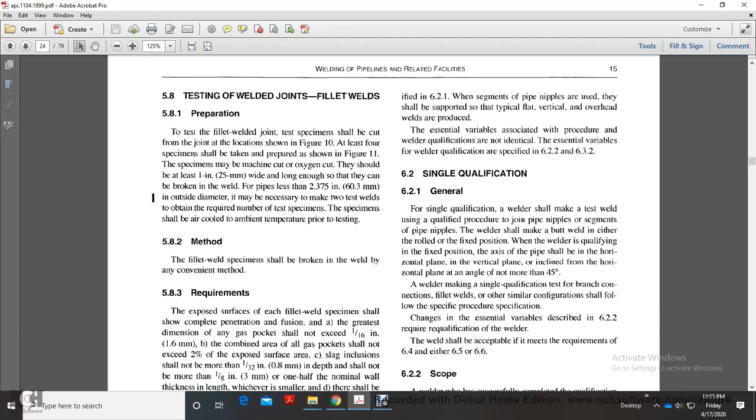A welder making a single qualification test for branch connections, fillet welds, or other similar configurations shall follow the specific procedure specification. Changes in the essential variables described in 6.2.2 require requalification of the welder. The weld shall be acceptable if it meets the requirements of 6.4 and either 6.5 or 6.6. Scope. A welder who has successfully completed the qualification test in 6.2.1 shall be qualified within the limits of the essential variables described below. If any of the following essential variables are changed, the welder using the new procedure shall be requalified.

A change from one welding process to another welding process or combination of processes, as follows: a change from one welding process to a different welding process, or a change in the combination of welding processes, unless the welder has qualified on separate qualification tests using each of the welding processes that are to be used for the combination welding process. B. A change in the direction of welding from vertical uphill to vertical downhill, or vice versa. A change of filler metal classification from Group 1 or 2 to Group 3, or from Group 3 to Group 1 or 2. A change from one outside diameter group to another.

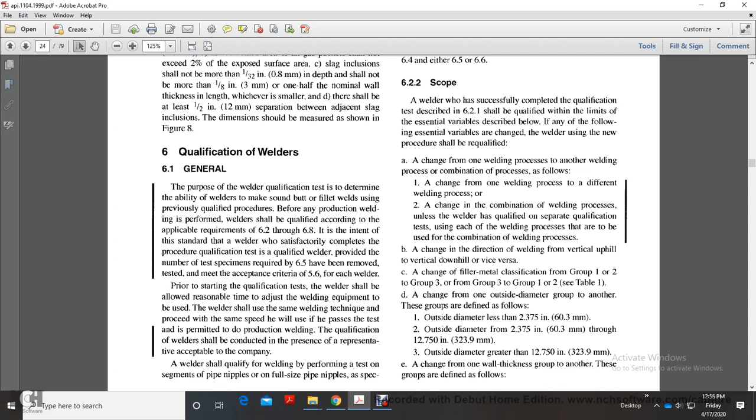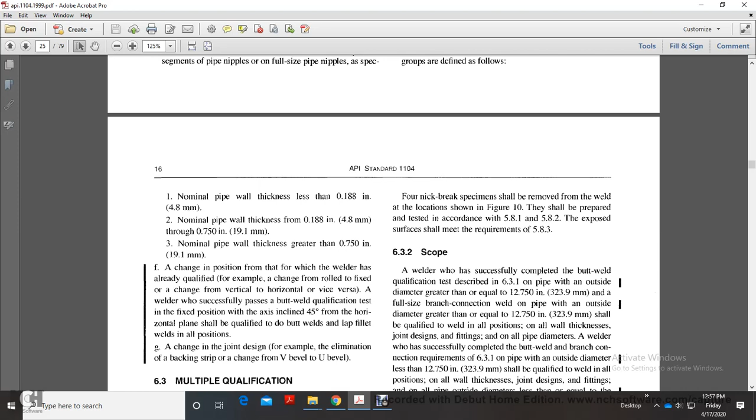These groups are defined as follows: outside diameter less than 2.375 inches, outside diameter from 2.375 to 12.750 inches, and outside diameter greater than 12.750 inches. A change from one wall thickness group to another. These groups are defined as follows: nominal pipe wall thickness less than 0.188 inches, nominal pipe wall thickness from 0.188 inches through 0.750 inches, and nominal pipe wall thickness greater than 0.750 inches. A change of the position from that in which the welder has already qualified.

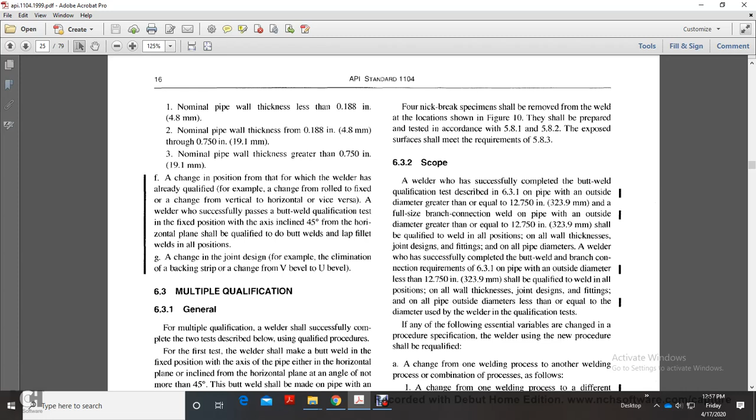For example, a change from rolled to fixed, or a change from vertical to horizontal, or vice versa. A welder who successfully passes a butt weld qualification test in the fixed position with the axis inclined 45 degrees from the horizontal plane shall be qualified to do butt welds and lap fillet welds in all positions. A change in the joint design, for example, elimination of the backing strip or changing from V to U bevels.

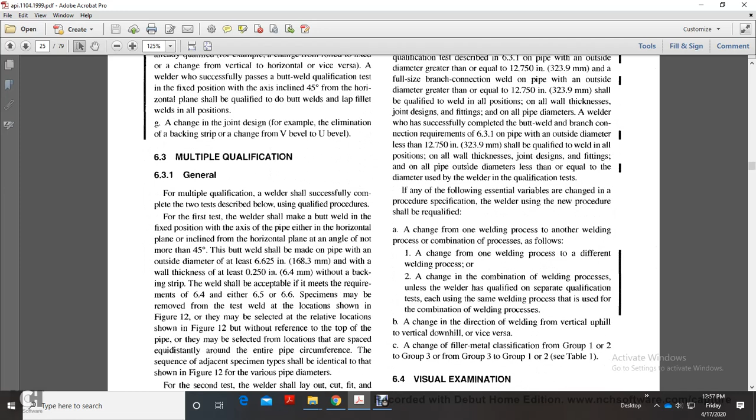Multiple qualification. For multiple qualification, a welder shall successfully complete the two tests described below using qualified procedures. For the first test, the welder shall make a butt weld in the fixed position with the axis of the pipe either horizontal or inclined from the horizontal plane at an angle of not more than 45 degrees. The butt weld shall be made on pipe with an outside diameter of not less than 6.625 inches and with a wall thickness of 0.25 of an inch without a backing strip.

The weld shall be acceptable if it meets the requirements of 6.4 and either 6.5 or 6.6. Specimens may be removed from the test weld at the locations shown in Figure 12, or may be selected at the relative locations shown in Figure 12.

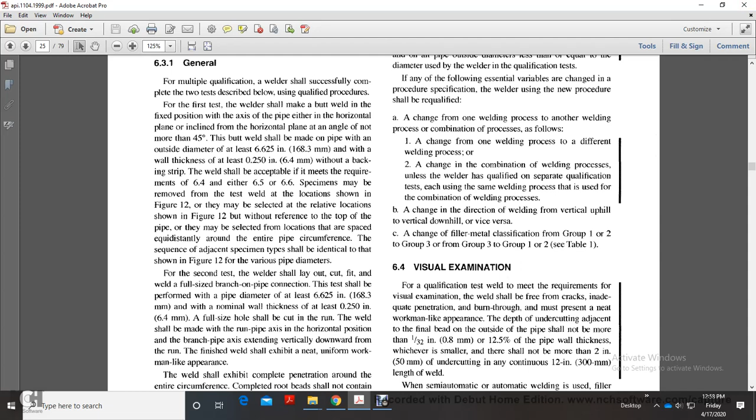But without reference to the top of the pipe, they may be selected with the location spaced equal distance around the entire pipe circumference. Sequence of adjacent specimen types shall be identical to that shown in Figure 12 for various pipe diameters.

For the second test, the welder will lay out, cut out, and fit and weld a full-size branch-on-pipe connection. The test should be performed with a pipe diameter of at least 6.625 inches and with a nominal wall thickness of a quarter of an inch. A full-size hole shall be cut in the run, and the weld shall be made with the run pipe axis in the horizontal position and the branch pipe axis extending vertically down from the run.

The finished weld shall exhibit a neat, uniform, workman-like appearance. The weld should exhibit complete penetration around the entire circumference of the completed root bead. It shall not contain any burn-through of more than a quarter inch. The sum of the maximum dimensions of separate unrepaired burn-throughs in any continuous 12-inch length of the weld shall not exceed 1/2 inch.

Four nick-break specimens shall be removed from the weld at the locations shown in Figure 10. They should be prepared and tested in accordance with 5.8.1 and 5.8.2. The exposed surface shall meet the requirements of 5.8.3.

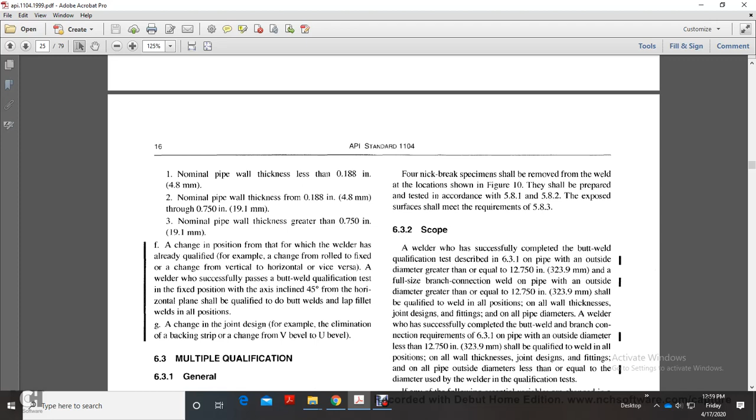Alright, 6.3.2 scope. If the welder has successfully completed the butt weld qualification test described in 6.3.1 on pipe with an outside diameter greater than or equal to 12 3/4 inches and a full-size branch connection on pipe with an outside diameter greater than or equal to 12 3/4 inches, they shall be qualified to weld in all positions, all wall thicknesses, joint designs, and fittings on all pipe diameters. If the welder has successfully completed the butt weld and branch connection requirements of 6.3.1

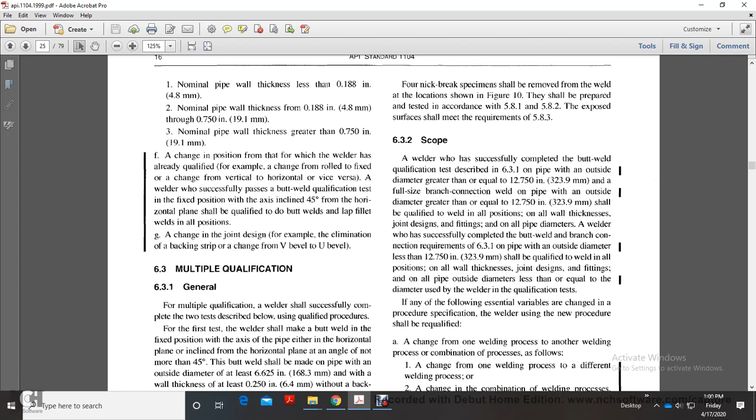on piping of outside diameter less than 12 3/4 inches, they shall be qualified to weld in all positions, on all wall thicknesses, joint designs, and fittings on all pipe outside diameters less than or equal to the diameter used in the welder qualification testing. If any of the following essential variables change in the procedure specification, the welder using the new procedure shall be requalified.

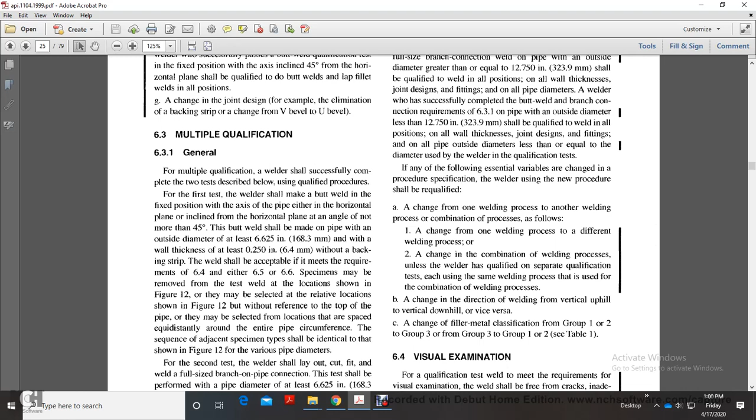A change from one welding process to another welding process or combination of processes, or a change in the combination of welding processes, unless the welder has qualified in separate qualification tests, each using the same welding process that is used for the combination welding procedure. A change in the direction of welding from vertical uphill to vertical downhill or vice versa. A change of filler metal classification from group 1 or 2 to group 3, or from group 3 to 1 or 2.

6.4 visual examination. For qualification testing, the weld shall meet the requirements for visual examination. The weld should be free from cracks, inadequate penetration, and burn-through. It must present a neat, workman-like appearance. The depth of undercutting adjacent to the final bead on the outside of the pipe shall not be more than 1/32 of an inch or 12.5% of the pipe wall thickness, whichever is smaller, and there shall not be more than 2 inches of undercutting in a continuous 12-inch length of the weld.

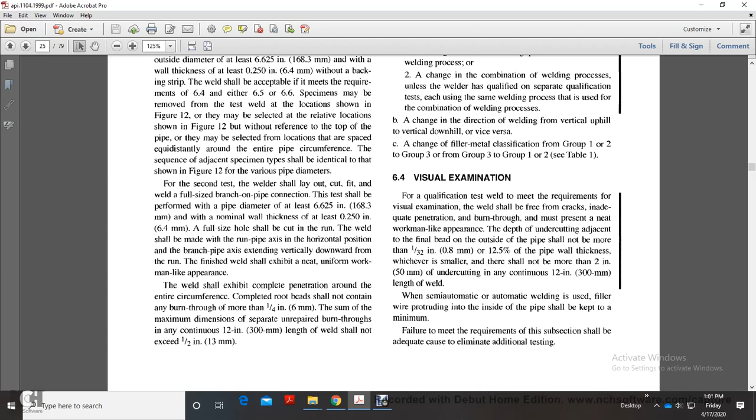When semi-automatic or automatic welding is used, filler wire protruding into the inside of the pipe shall be kept to a minimum. Failure to meet the requirements of this subsection shall be adequate cause to eliminate additional testing.

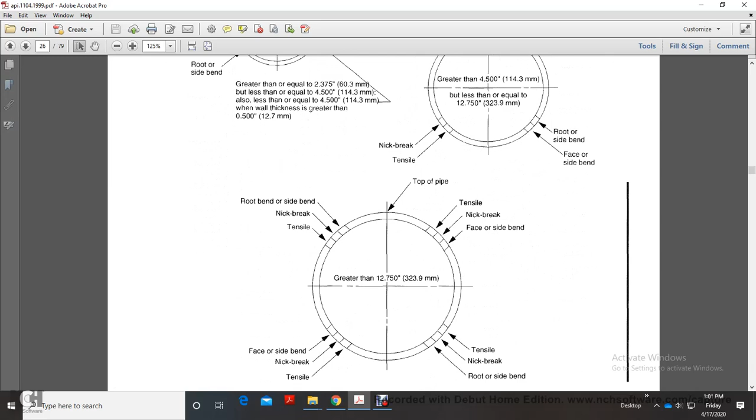figure table 3. Specimens shall be air cooled to the ambient temperature prior to testing. For pipe with an outside diameter less than or equal to 1.315 inches, one full pipe section specimen may be substituted for the root bend and nick break specimens. Full section specimens shall be tested in accordance with 5.6.2.2 and shall meet the requirements of 6.5.3.

6.5.2 Tensile strength, nick break, and bend test procedures for butt welds. Specimens shall be prepared for tensile strength, nick break, and bend tests. The tests shall be performed as described in 5.6. However, for the purpose of welder qualification, it is not necessary to calculate the tensile strength of the coupons. The tensile strength test may even be omitted, in which case the specimens designated for the test shall be subjected to the nick break test.

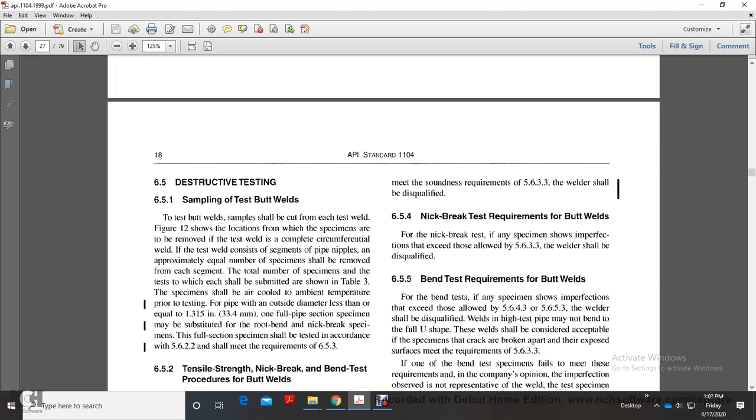6.5.3 Tensile strength test requirements for butt welds. For the tensile strength test, if any of the reduced section specimens or full section specimens breaks in the weld, or at the junction of the weld and the parent material, and fails to meet the soundness requirements of 5.6.3.3, the welder shall be disqualified. 6.5.4 Nick break test requirements for butt welds. For the nick break test, if any specimen shows imperfections exceeding those allowed in 5.6.3.3, the welder shall be disqualified.

6.5.5 Bend test requirements for butt welds. For the bend test, should the imperfections in a specimen exceed those allowed in 5.6.4.3 or 5.6.5.3, the welder shall be disqualified. Welds in high test pipe may not bend to the full U shape. These welds shall be considered acceptable if the specimens that crack are broken apart and their exposed surfaces meet the requirements of 5.6.3.3.

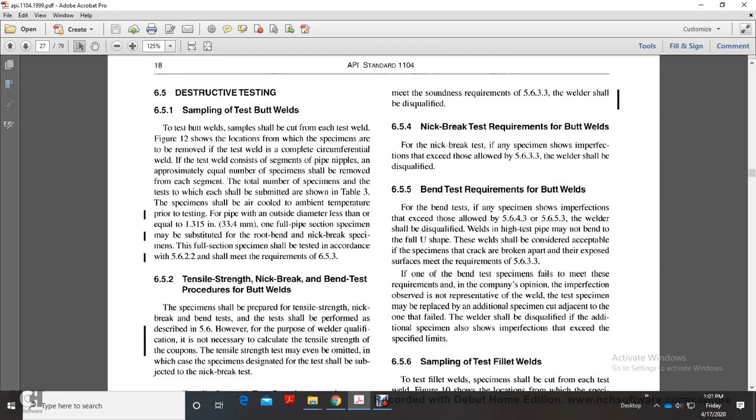If one bend test specimen fails to meet the requirements and, in the company's opinion, the imperfection observed is not representative of the weld, the test specimen may be replaced by an additional specimen cut adjacent to the one that failed. The welder shall be disqualified if the additional specimen also shows an imperfection exceeding the specified limits.

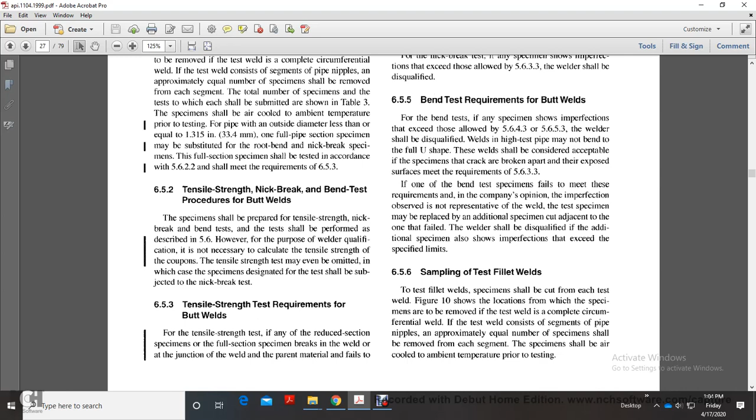6.5.6 Sampling and testing of fillet welds. Test fillet weld specimens shall be cut from each test weld; figure 10 shows the location from which specimens are removed. If the test weld is a complete circumferential weld, or the test weld consists of weld segments of pipe nipples, an approximately equal number of specimens shall be removed from each segment. These specimens shall be air cooled to the ambient temperature prior to testing.

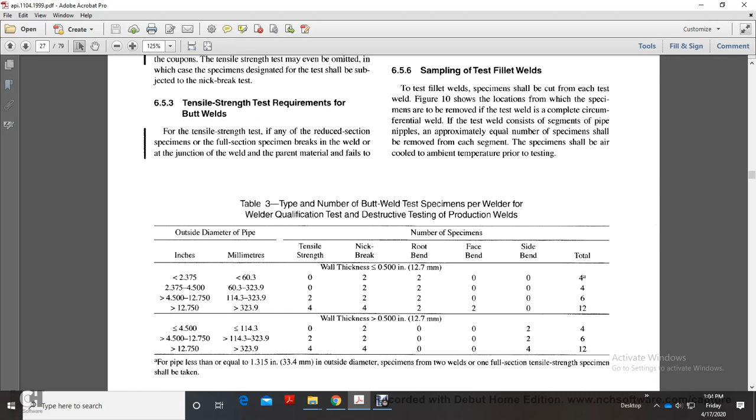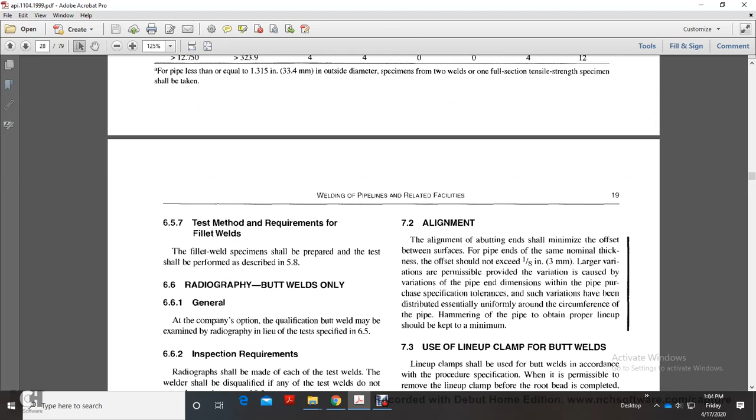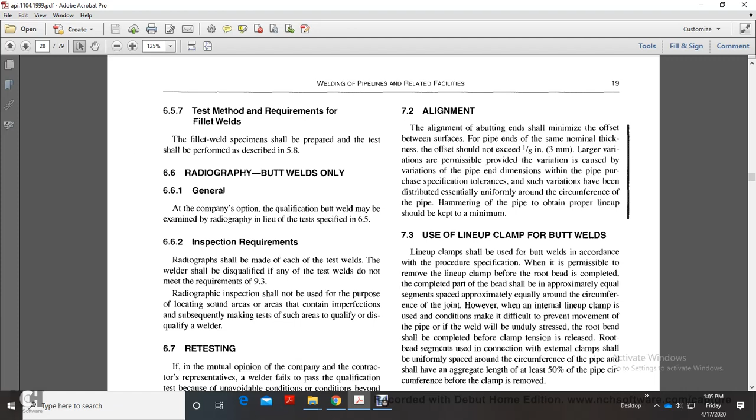Alright, 6.5.7, test method and requirements for fillet welds. Fillet weld specimens shall be prepared and the test performed as in 5.8 and 6.6. Radiography, butt welds only. General: at the company's option, the qualification weld may be examined by radiography in lieu of the tests specified in 6.5. 6.6.2 Inspection requirements. Radiographs shall be made of each of the test welds. The welder shall be disqualified if any of the test welds do not meet the requirements of 9.3. Radiographic inspection shall not be used for the purpose of locating sound areas or areas that contain imperfections and subsequently making tests of such areas to qualify or disqualify a welder.

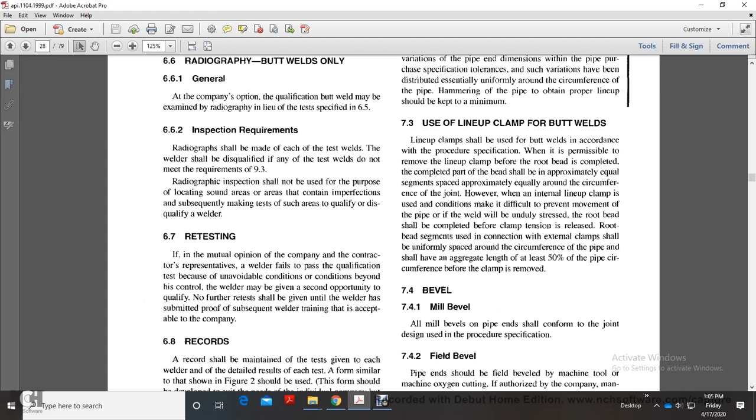6.7 Retesting. If, in the mutual opinion of the company and the contractor's representatives, a welder fails to pass the qualification test because of unavoidable conditions or conditions beyond his control, the welder may be given a second opportunity to qualify. No further retests shall be given until the welder has submitted proof of subsequent welder training that is acceptable to

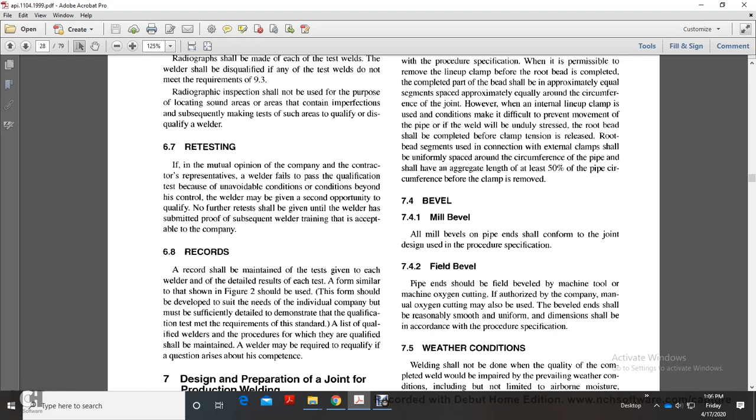the company. 6.8 Records. A record shall be maintained of the tests given to each welder and the detailed results of each test. A form similar to that shown in figure 2 should be used. The form should be developed to suit the needs of the individual company, but must be sufficiently detailed to demonstrate that the qualification test met the requirements of this standard. A list of qualified welders and the procedures for which they are qualified shall be maintained. A welder may be required to requalify if a question arises about his competency. Chapter 7. Design and preparation of a joint for production welding.